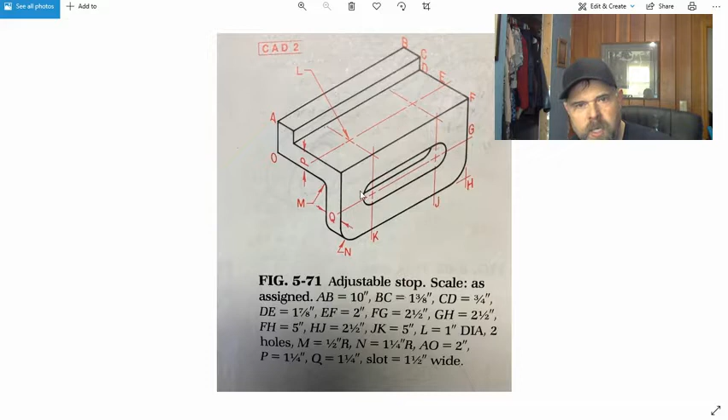What I'm going to do, whereas we've been drawing this as our front side, everything pointing toward the left is our front side, your bigger view, your most interesting view is your right side view. So I'm going to turn that around and make that my front view, and get started with that.

And I'm going to go ahead and download that template real quick, my multi-view drawing template here. It's got all my layers there.

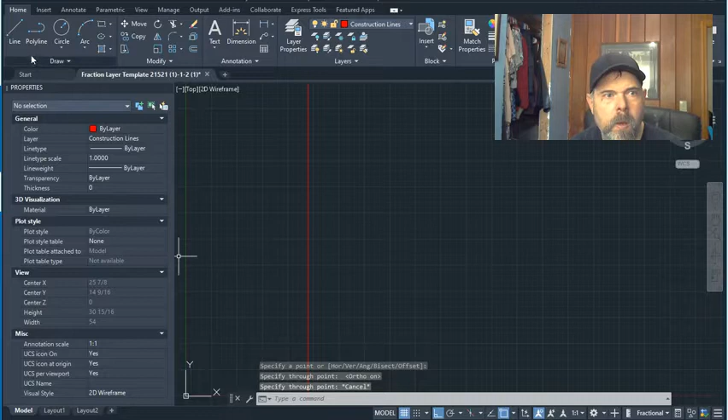I'm going to go in here, go ahead and set my construction line as my 0, 0 point. Turn on my ortho. Get my construction line again and set my horizontal 0, 0 point.

Then go back to my drawing example. I'm going to start here with this N, this H to J or N to K. We know that H to J and N to K are basically the same size. I know H to J, which is right here, 2 1/2. I know 2 1/2 plus 5 plus 2 1/2, right? So I'm going to just draw a line 10 inches long.

I'm going to draw it out 10 inches. Draw a little flag up, just going to hit a little flag there.

Get back to my drawing example here. I know H, F to G, G to H. We know that's basically 5 inches. We know F to H is 5 inches because it tells us right there it's 5 inches.

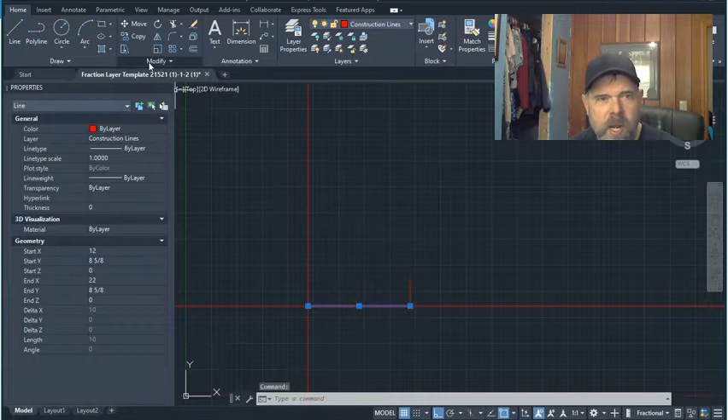So what I'm going to do is I'm going to offset that line that I've drew 5 inches. Type in 5, put it up here. And then I'm going to use construction line here and draw a line straight up.

Now get back to our drawing here. I know at this 2.5 inch mark here, there's a line that comes through there that sets our center for our slot. All right, so I know that. So let's go ahead and set our center line there.

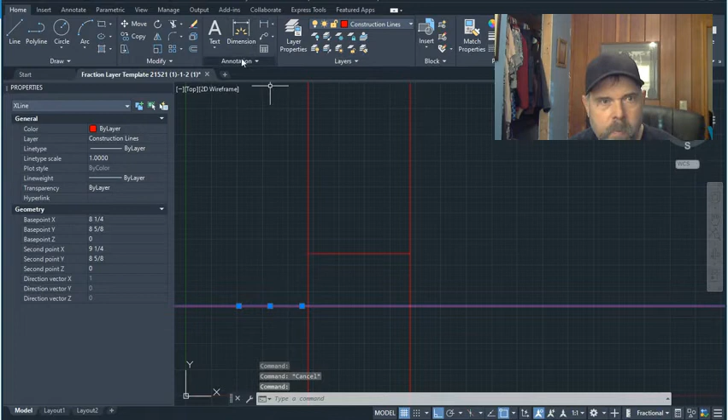So I'm going to set that line, I'll set that. I'm actually going to offset it as a construction line. I'm going to go at 2.5. Set it.

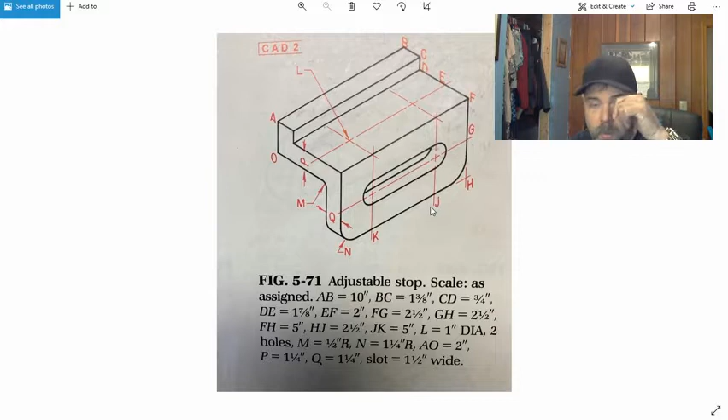And I know coming from H to J is my first dimension for my hole there. H to J is 2.5. So I'm going to go ahead and draw that 2.5 inch marker.

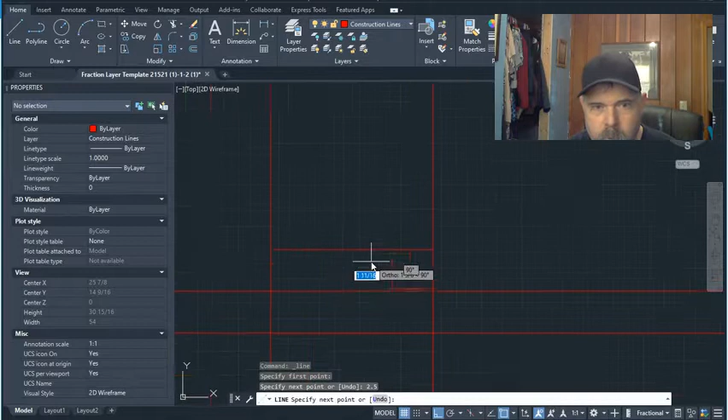2.5. Draw a little flag up so I can zoom in there. Oh, wait a minute, something got off there.

Evidently my line didn't snap there. So I'm coming in 2.5, 2.5. Draw a little flag up there.

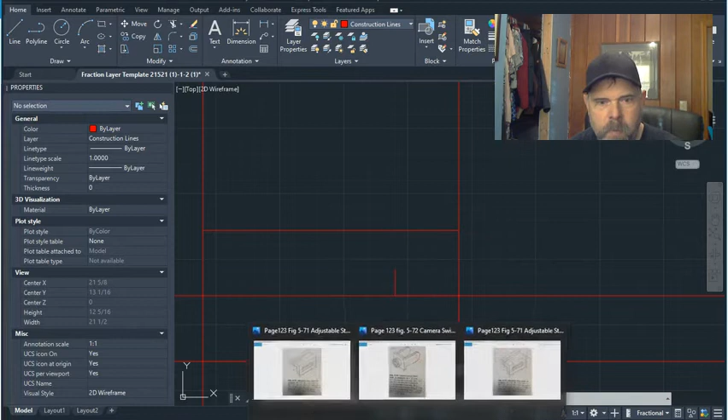Now I'm going to get back here to my drawing example. I know that hole, we know that L is 1 inch diameter. We know the slot is 1 1/2 inch wide. So we know this is 1 1/2 inch diameter, and this slot here is 1 1/2 inch diameter.

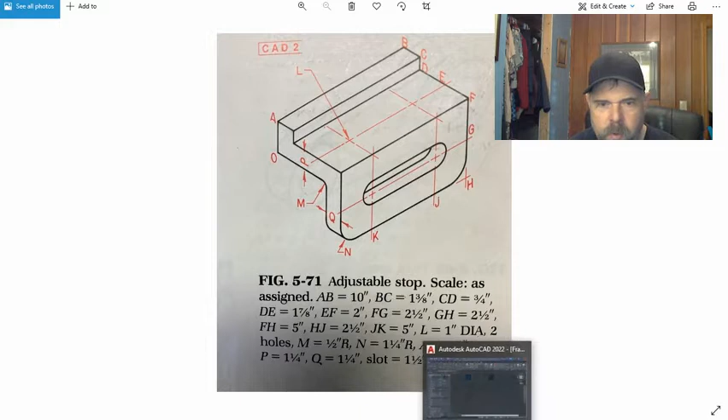So let's go to the drawing. Get our diameter tool, 1.5. And what I'm going to do is offset this circle here 5 inches. Not the wrong way, it'll be easier to copy it.

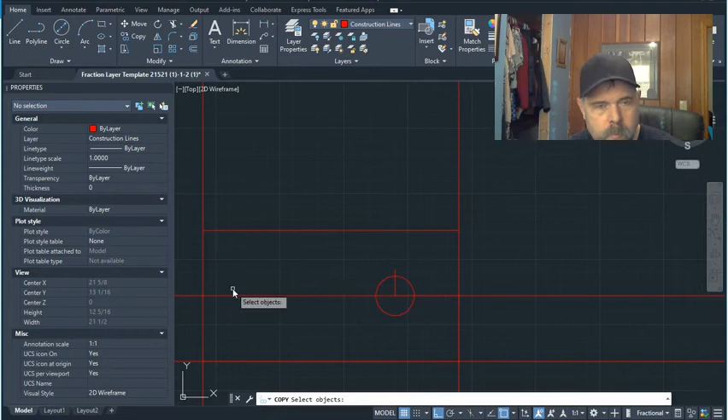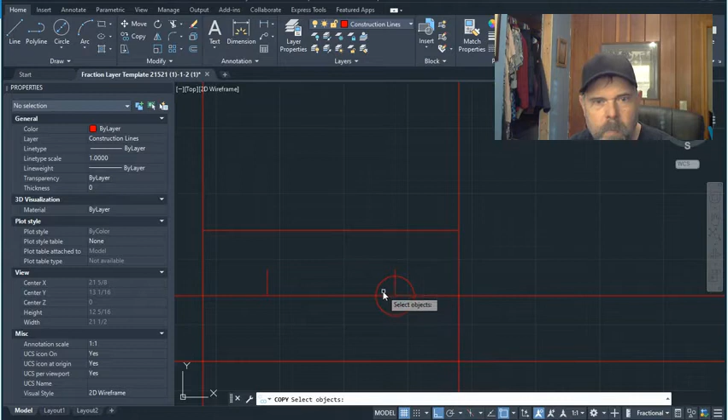Easier to offset that line first, and then copy my circle. Actually, I don't want to offset the circle, I just want to copy it. Yeah, the circle gets sort of funny when you go to offset it. It wants to offset using the same center, so that doesn't work.

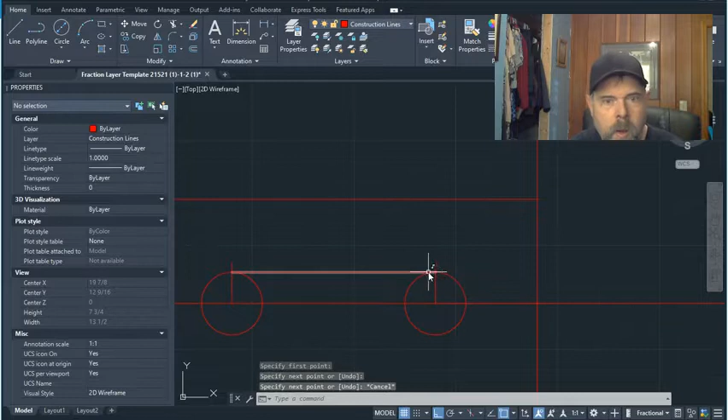And I just jumped off that. Now I can draw that line on the bottom, but guess what? Why don't we just do it this way? Just mirror it.

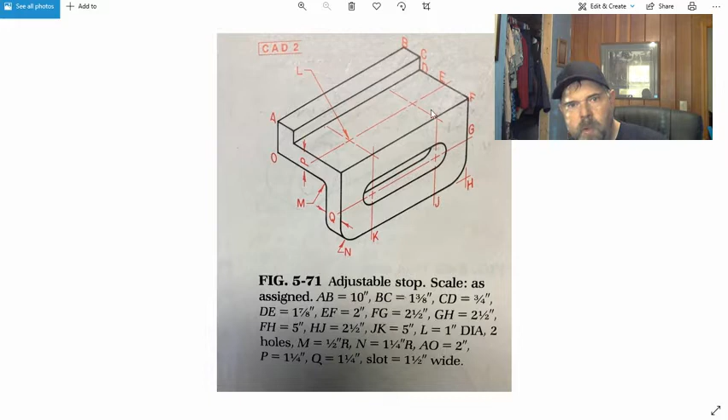And tell it, no, we don't want to erase that source line. Then we're going to go back to our drawing example. That 5 inches goes up to that corner, and then on top of that corner, we're going to see C to D. It's 3/4 inches above that, so we got to go to there.

So what I'm going to do, instead of just drawing that line up, I'm just going to offset that 0.75.

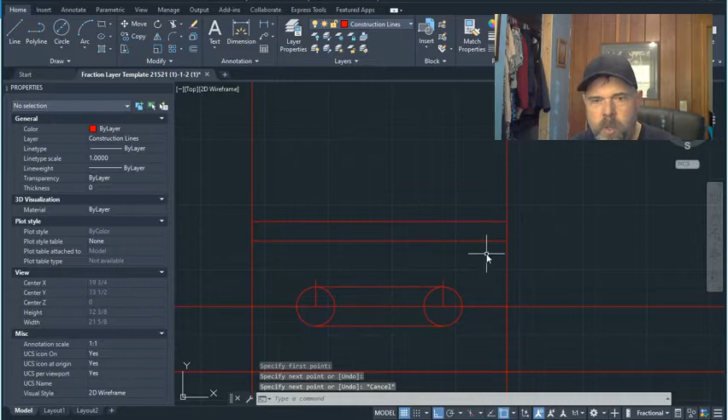And you can come back here and draw these lines in on your construction lines, or you don't have to. As long as your object lines are attached, that's all that really matters. Your construction lines are there just to help you get that drawing done.

All right, so let's scoot over here. Oh, I got to finish the radiuses down here. Now again, you don't have to do this on both sides, your construction lines and your object lines. But I just want to remind you that N is 1 1/4.

So what I'm going to do is go up here and hit my radius tool. And of course, I don't have a regular line there, I've got a construction line, so I have to draw my line straight down, on both sides.

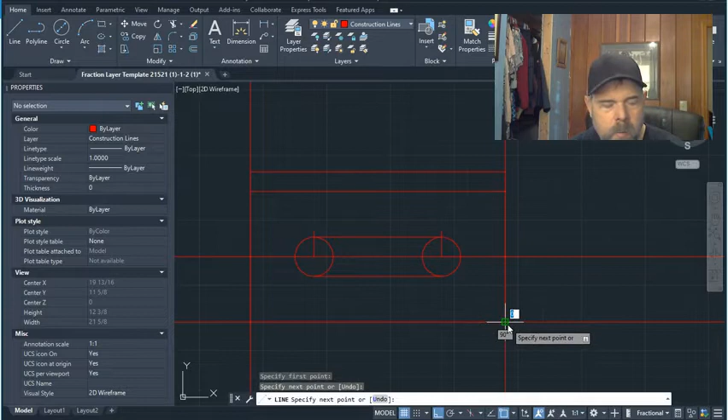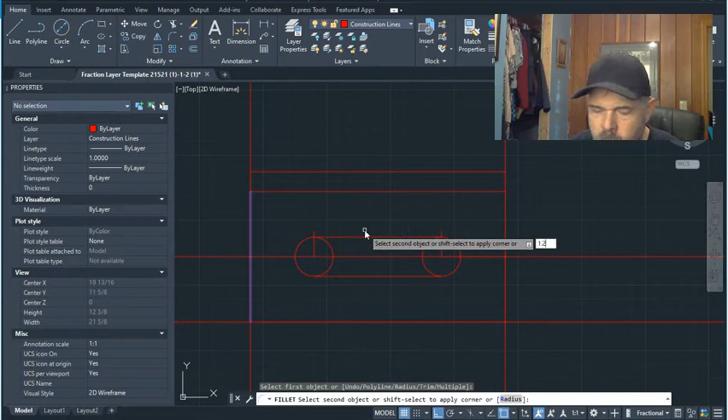If I was doing this as an example here, I would probably not draw it on my construction lines. Draw it on my object lines.

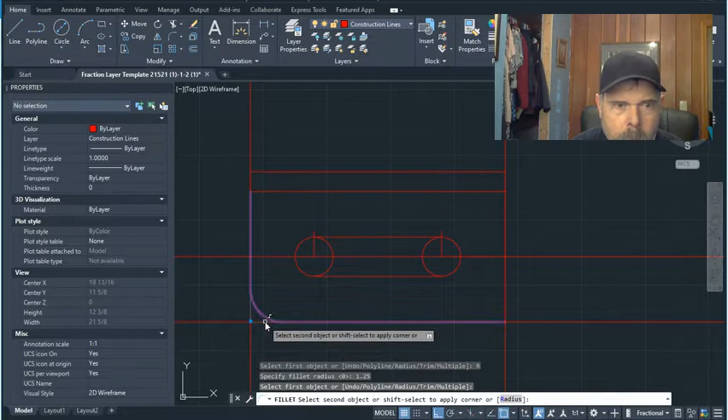All right, try this for a third time here. Third time's always a charm. My computer was being a little silly here. 1.25.

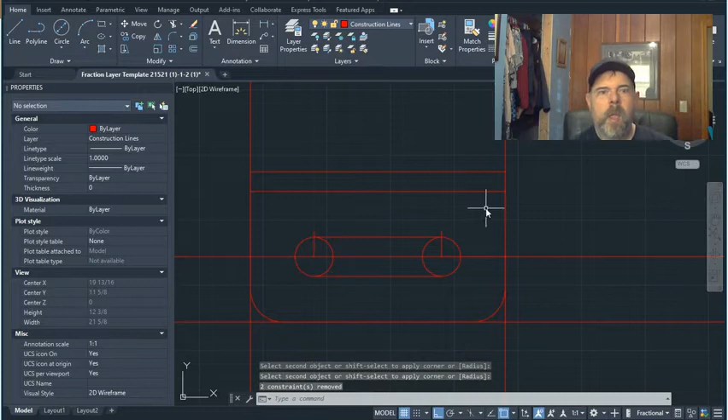Now, that is your construction line layer for that front view, except for you got hidden lines that are going to be showing up through here. Now let's go ahead and move up to the top and do that one next, because it'll be much easier once we get that done to bring our hidden lines down.

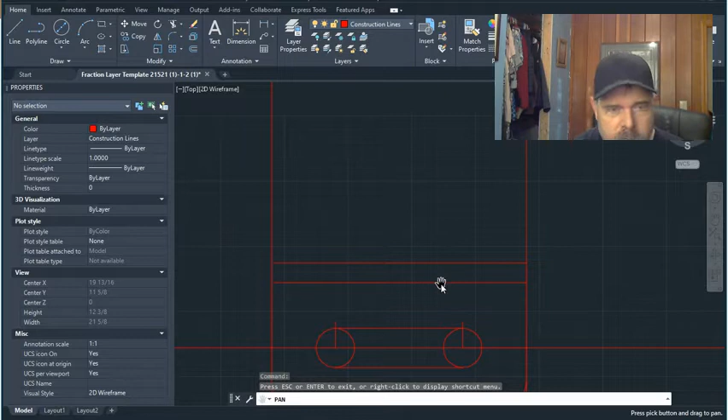I'm going to take that line and offset that 2 inches above. Get back to my drawing example. I know that B to C is 1 3/8. D to F...

All right, so we're going to have to do it this way. Use my calculator. So I know that B to C is 1 3/8, or 1.375. Plus D to E is 1 7/8, which is 1.875. Plus E to F, which is 2 inches.

So we're looking at 5 1/4 inches there from F to B, 5 1/4. So I'm going to offset that line 5.25.

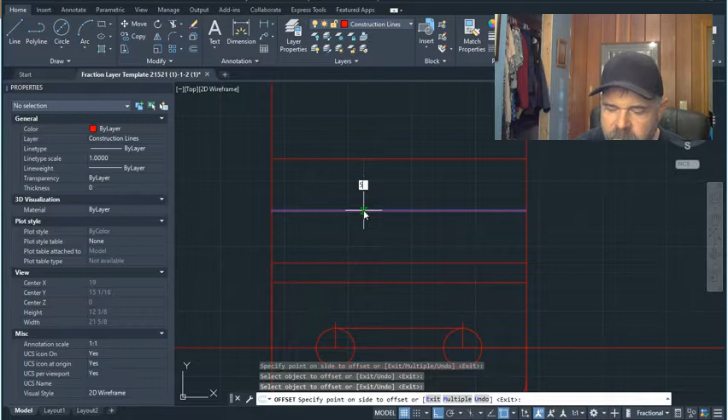And there it is. Now, looking at your drawing example again, I know that B to C is 1 3/8. So I'm going to offset that back line forward 1.375.

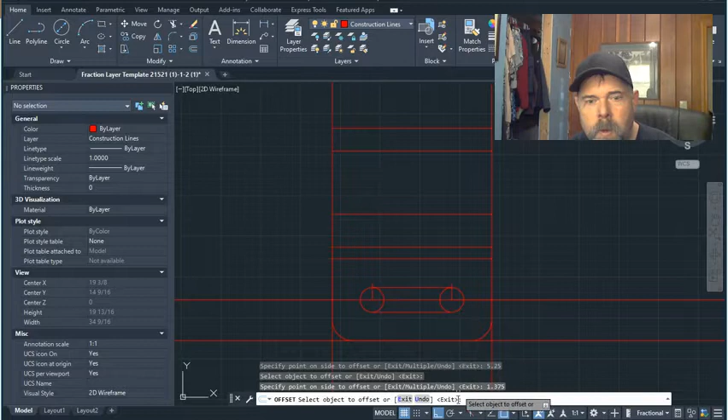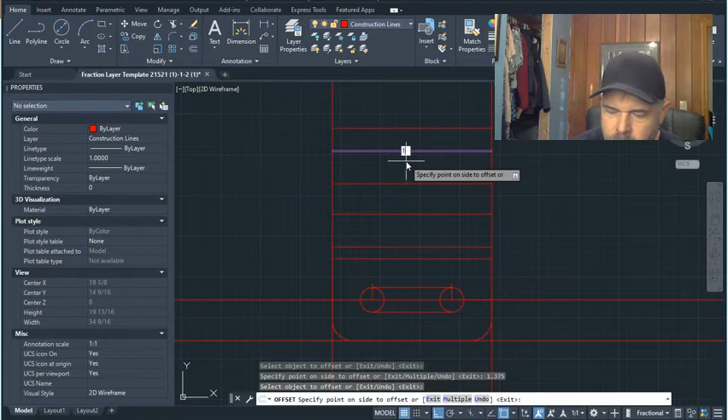And I'm going to offset that back. That's where we put C, which would be coming down to the edge of D. I'm going to offset that D to E distance, D to E, with 1 7/8. So I'm going to offset that line here 1.875. Not 1.85, 1.875.

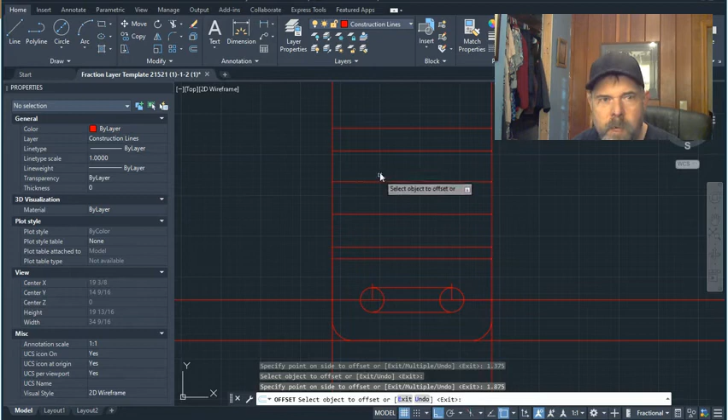But we got to find the location of those, and they're at the same distance as J and K as centers. So we know H to J is 2.5. So let's come up here and come down from the end, 2.5, 2.5.

All right, we're coming over here for 2.5. Coming over here 2.5, 2.5, that's 5. We could come back from this end 2.5 and this end 2.5. Or what I basically did is I offset this one, came over 2.5, and offset that one 5, which would make this 2.5 to this end.

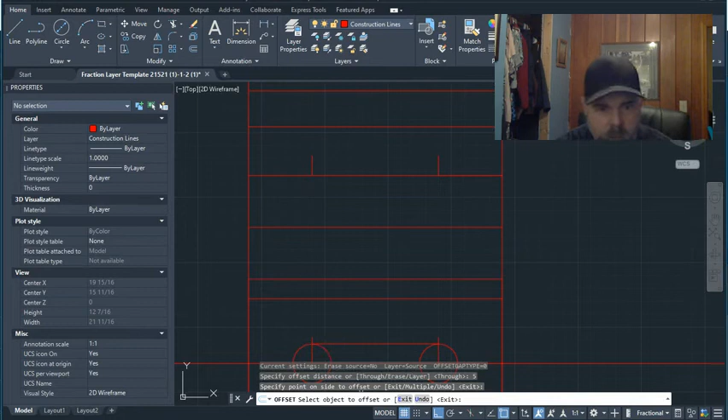So let's go back to our drawing example and make sure what our circle is on this top up here. We know that that's 1 inch diameter. There's not a slot there, just a hole. A 1 inch diameter hole.

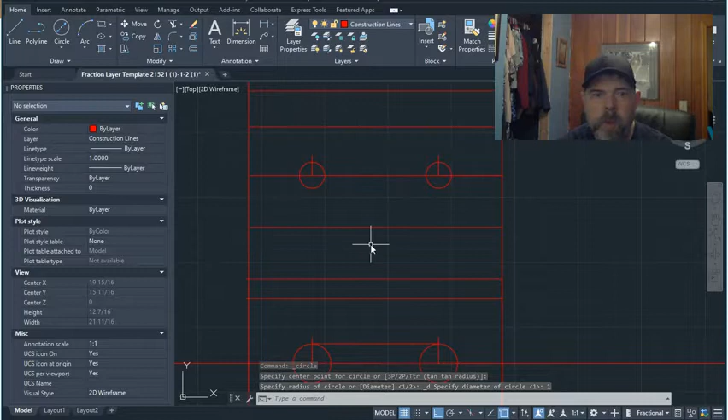So, 1, 1, and now we have... you got to show the thickness here of that object here.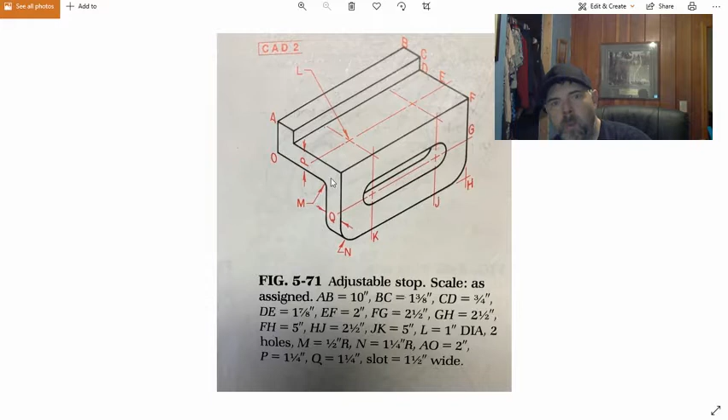Because we know that object here is the thickness of P, it's 1 1/4. So I'm just going to go ahead and do that. I could do that off of my right side, but I'm going to do it off the front view because I know that's going to be 1 1/4 down from that. So 1.25

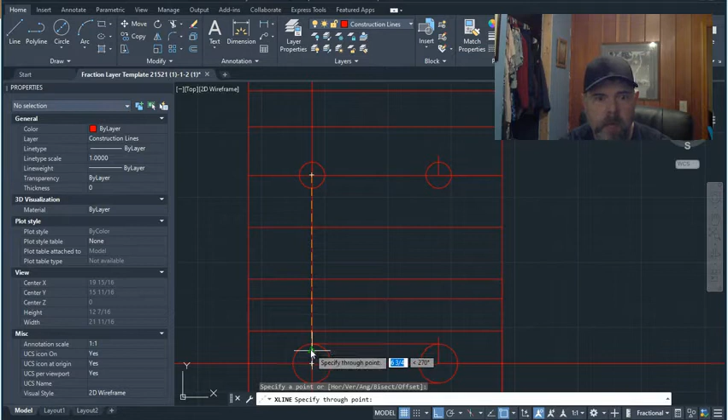Down this way, and then I'm going to do my construction line down to the center here. Now the construction line here. Oh, there we go.

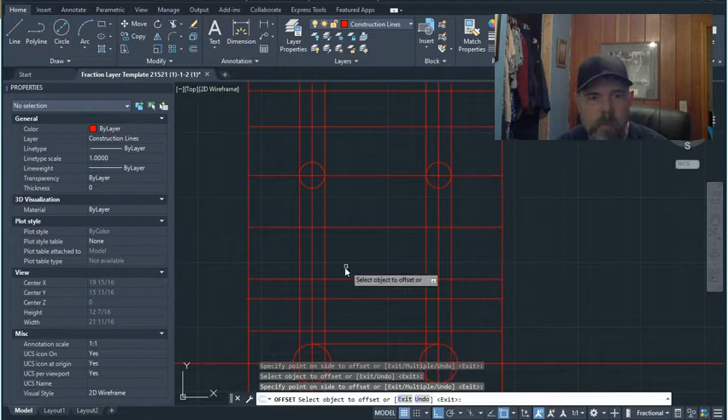Now, I know I can offset that line 1/2, 0.5, to the outside. 1/2 to that side, 1/2 to that side, and 1/2 to that side. That's a 1 inch hole. There's no slot in the top, but it's a 1 inch hole.

All right, let's look at our drawing example again. That's pretty much all of our features for our top view and our front view.

Now let's go to our right side view. Get your construction line here. Pull that over this way. I'm going to take and offset this line here 2 inches. Just 2.

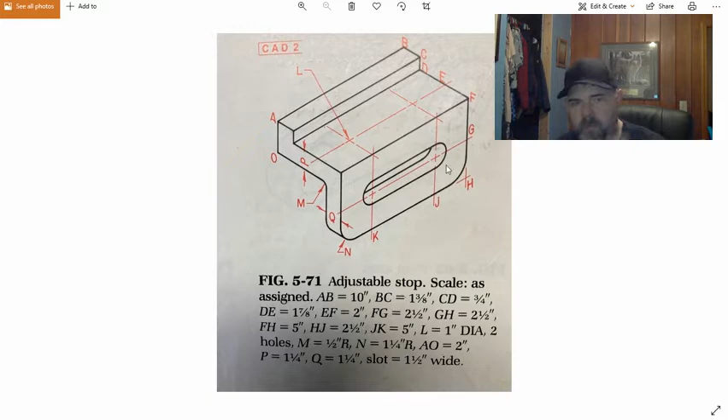Now you notice this object is really, really big compared to anything we've drawn before. All right, so let's go back to our drawing example because I want to know how far to offset the whole thing here. From the front edge to the back, we got F to H, that's 5. Got E to F is 2. We got D to E is 1 7/8, and B to C is 1 3/8.

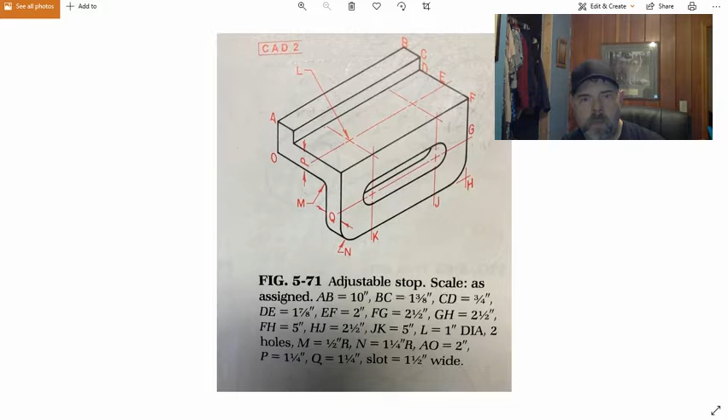So let's go back to our calculator again. That's 5 1/4 inches. So what I'm going to do is offset this backwards 5.25.

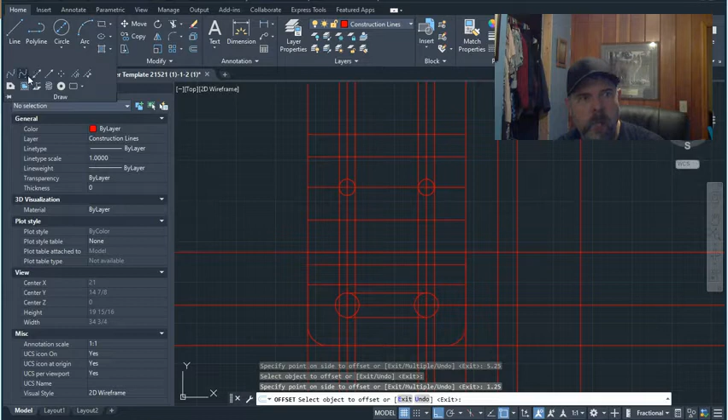If you look at the drawing example, I know I'm going to offset that front line on the left, the distance of Q, 1 1/4. So I'm going to offset this one in 1.25. Then I'm going to get another construction line right here and draw this line right there.

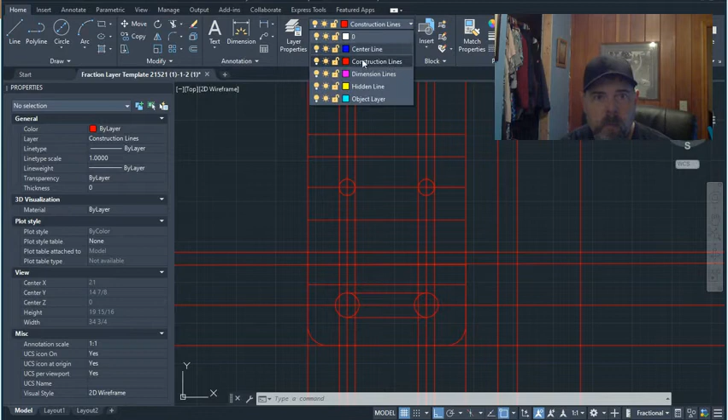Now, what I'm going to do is go ahead and start my object line layer. I don't want to do that. I just want to go to my layer and change it here.

Get my circle tool, 1 inch, and 1 inch. Get your line tool again.

And what I'm going to do is stretch that line straight down, and that way I don't have to make that arc. I can just use my fillet tool.

I'm going to offset. I could offset that line 3/4 of an inch again, but I'm not going to do that. It's just about as easy for me.

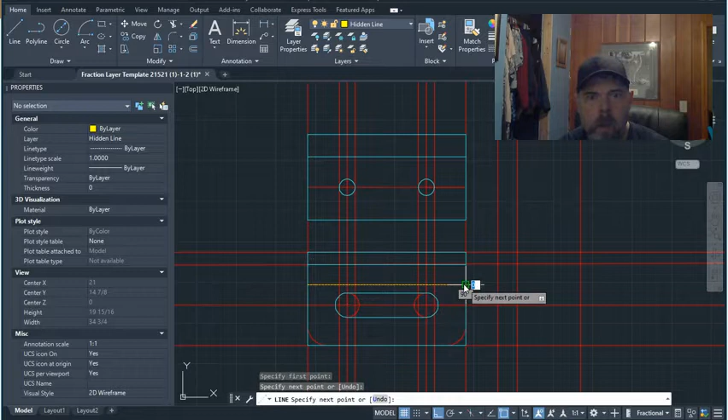I'm going to go to my hidden line layer. Then I'm going to go back to my radius tool, back to my object line layer.

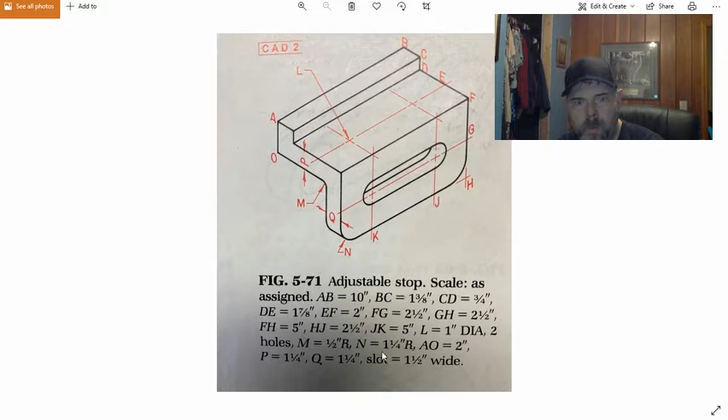Go back to my drawing and remind myself of what the radius of that is. So we're going to N, which is 1 1/4. Radius, 1.25.

Radius again. Hit enter because you're going to lock in that 1.25. All right, so that's your front view and your top view, except for your hidden lines coming through here. So let's change it to your hidden line layer.

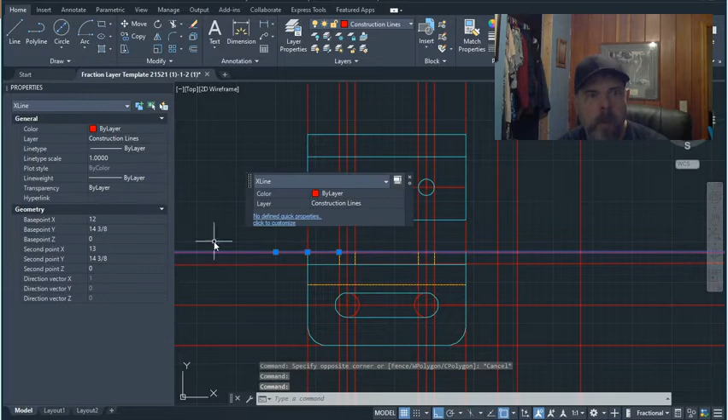And what I'm going to do is offset this line up here. I don't want to change the line, I just want to change it. So I want to hit escape. I want to offset that line 0.25 up, and I'll set this one down 0.25. And that way my hidden lines here and my center lines get drawn there.

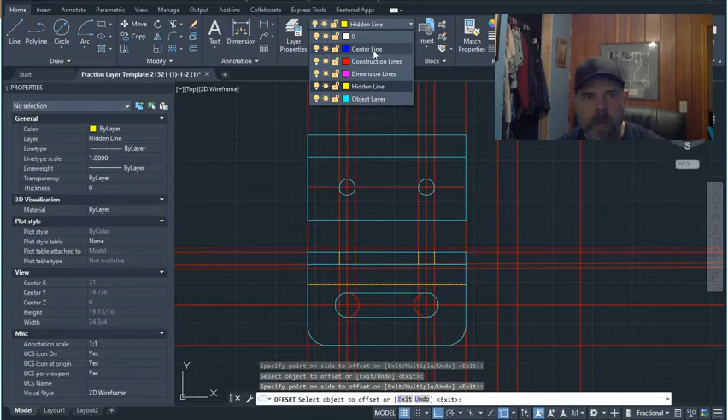And then I'll go back and work on my right side view. So I'm going to hit escape, get my center line tool, center line tool here. And now I'm going to finish up our right side view.

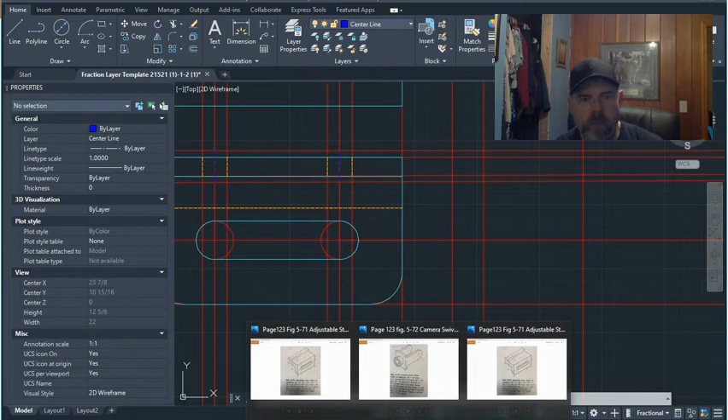Now that I can see those lines, I know this line has got to come forward for that backside. It's got to come B to C. It's 1 3/8 or 1.375. I know this has got to come forward 1.375.

And let's go to our object line layer, and basically what I'm going to do is just block this in real quick. Actually, I'm going to hold on to doing that line just a second. I'm going to bring this line down for the thickness of that,

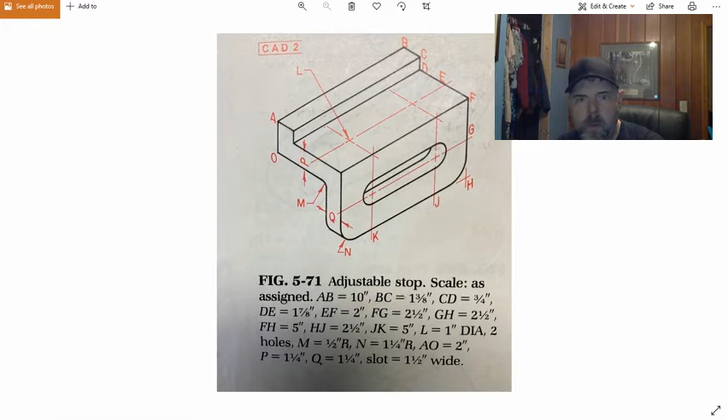because we know the thickness of that top, that's P, is 1 1/4. So I'm going to go down 1 1/4 with that. 1.25. I'm going to go here with my object line layer.

And mark that all the way around. Now, this line, this circle of this slot coming through here, you're just going to see it as hidden lines. And I need to remind myself of what that measurement is.

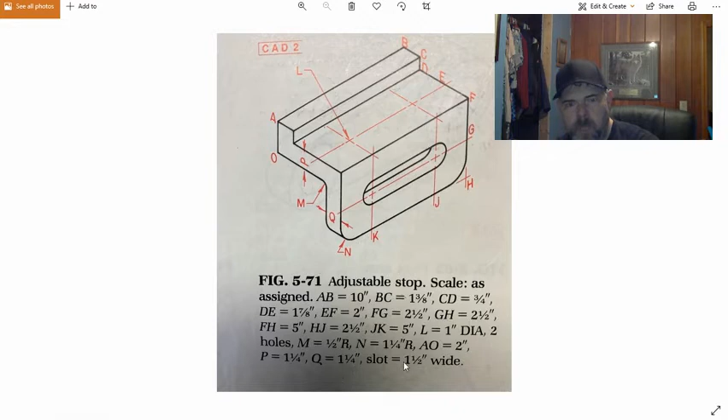We know that the slot is 1 1/2 inch wide, right? Slot says 1 1/2 inch wide. So what I'm going to do is offset that line from that point, 0.75 to the top and 0.75 to the bottom.

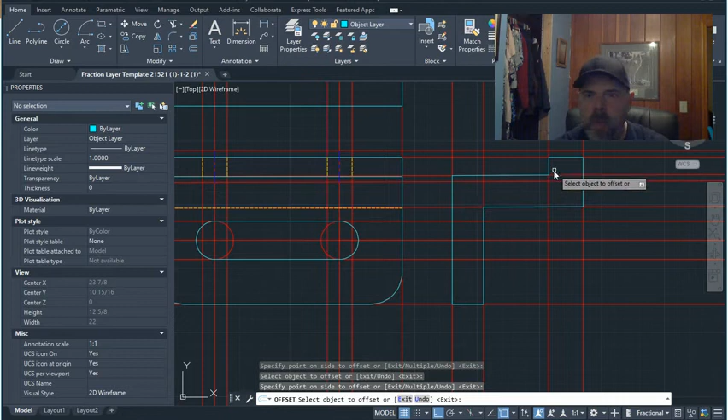And then I know that hole is directly in the center of this point here. Now what I'm going to do, I know this is 5 1/4.

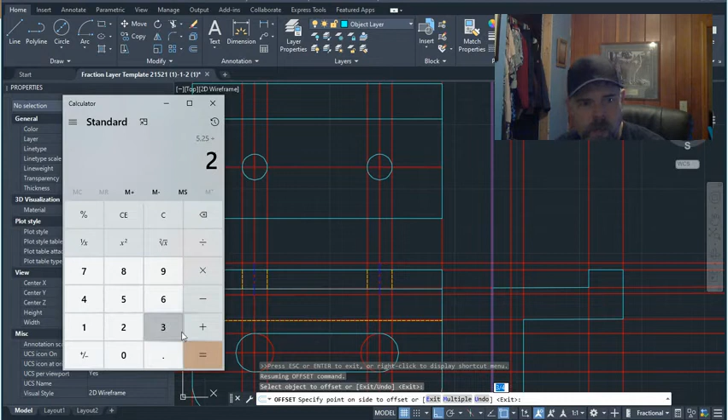I'm going to offset that line. Let's divide that by 2 to make it a whole lot easier than trying to do it in my head. 2.625, or basically 2 5/8.

I'm going to come off with that offset 1/2, 0.5. Now all I've got to do is my hidden lines.

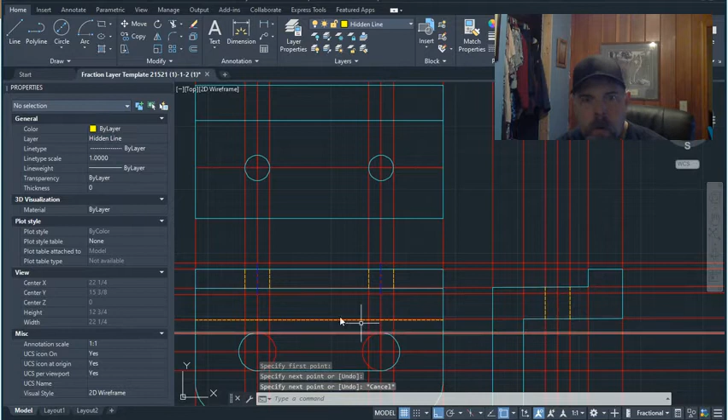Go up here and draw my hidden lines in. Hidden lines in. Draw my hidden lines in here. Draw my hidden line in here.

Now from the ends, that's going to look like a rectangle from this slot here. Now what I'm going to do here, I'm going to offset that line 1/4 inch to the front to make it easier to get my center line in there.

Offset this one 1/4 to the back. And I need to get backwards on that one because it set it to the wrong side. Sorry. .25.

Now I'll change it to my center line layer. Get my line tool. Actually, I...

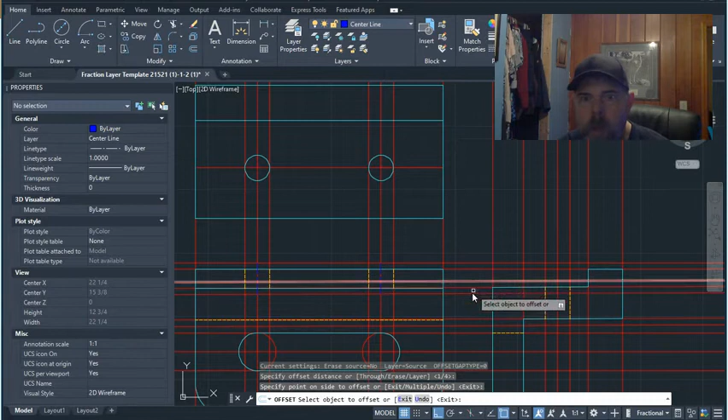Need to offset that line too. I forgot all my lines I need to change. Now we go to get our line tool.

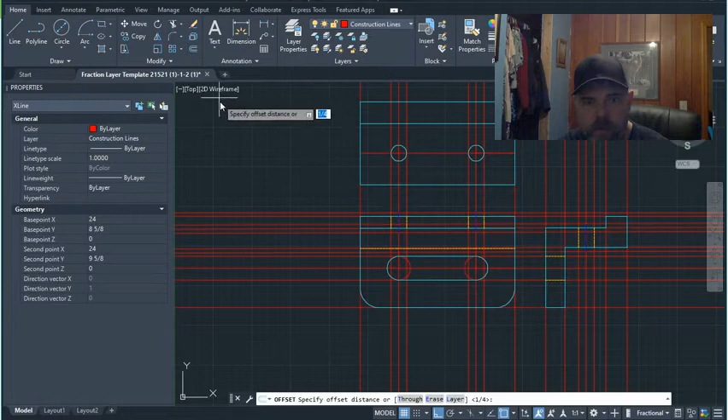Move our drawing around a little bit. I need to draw the hidden line there. I need to draw that offset 0.25 to make it easier on myself.

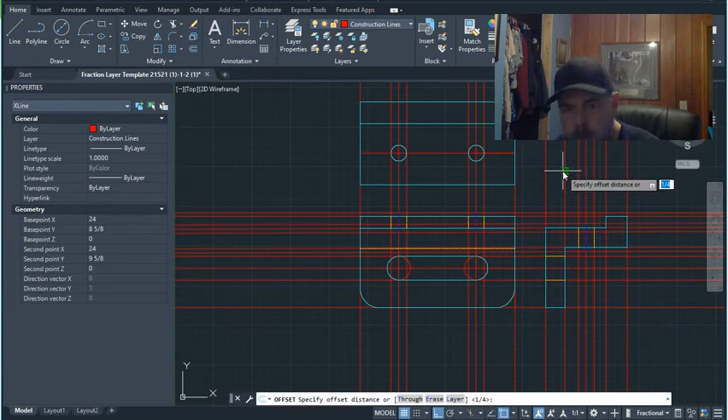Gotta go backwards. All right, now change it back to our center line layer.

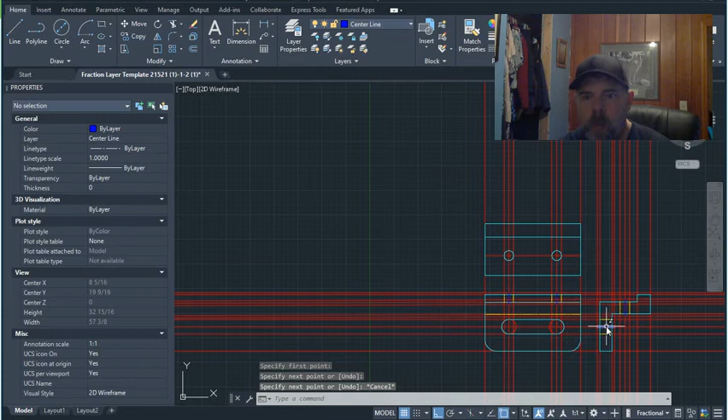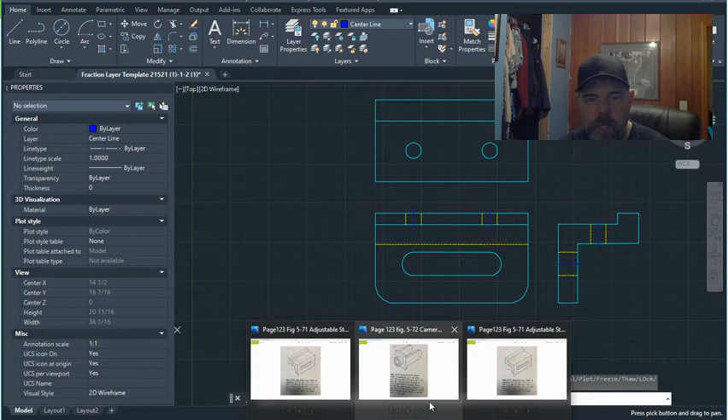Now I got one other place I need to change here. According to what the drawing looks like, but let me go ahead and turn my construction line layer off, that way I'm not killing myself by looking at it. This is the last place we've got to change.

M is a 1/2 inch radius. So let's go back to our drawing. Let's go to radius. This is R, 1/2 inch, 0.5.

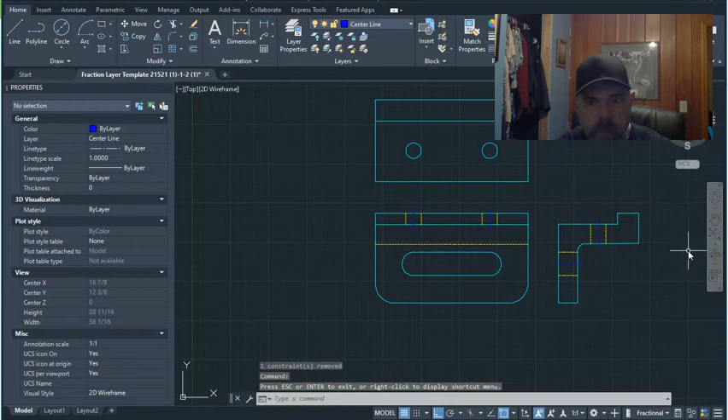And there you go. Now that's the drawing complete. And we just need to make sure we're complete with all the dimensions here. So what I'm going to do is move it around and dimension it.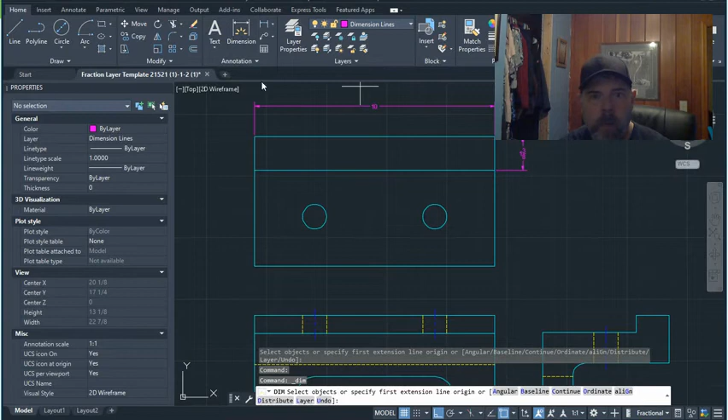Not with this center line, though. I'll need to go to my dimension lines. Get to my dimension lines here. Your dimensions give it to you from here to your center line.

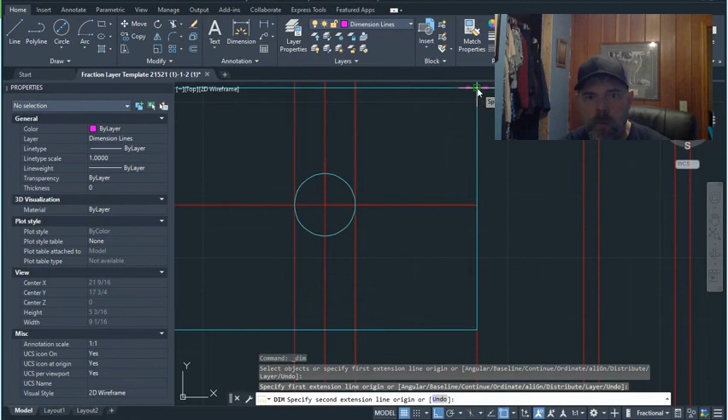So what I'm going to do is turn my construction lines back on just so I can dimension to my construction line. Then I'll turn those back off. So we're going from here to here. Remember, we chained those dimensions by clicking them at the same point.

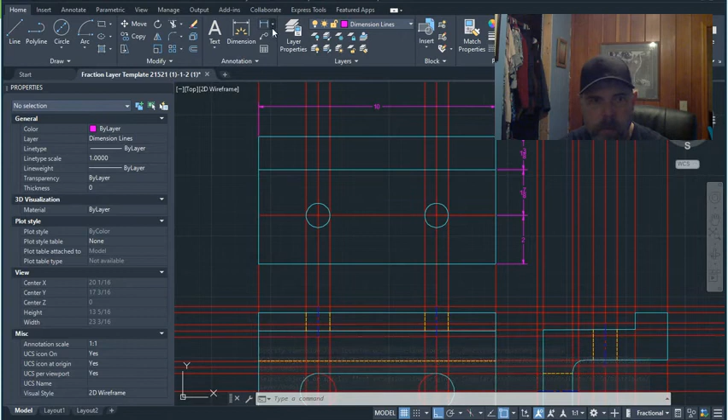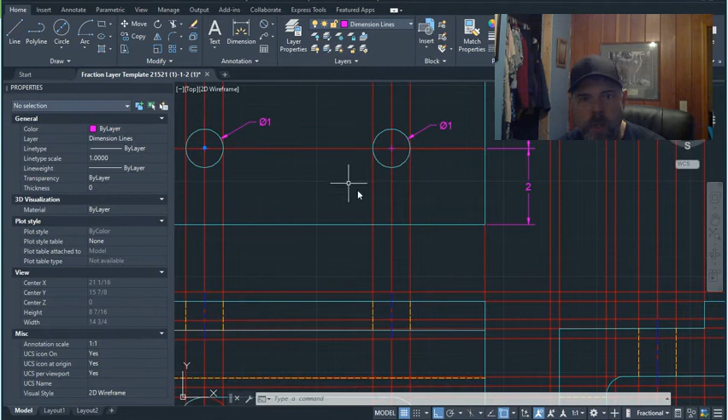We know that circle diameter is 1 inch. We know this one is 1 inch. We know your dimension. Let me turn those construction lines back off now. I think that's all I need those construction lines for, is for that dimension.

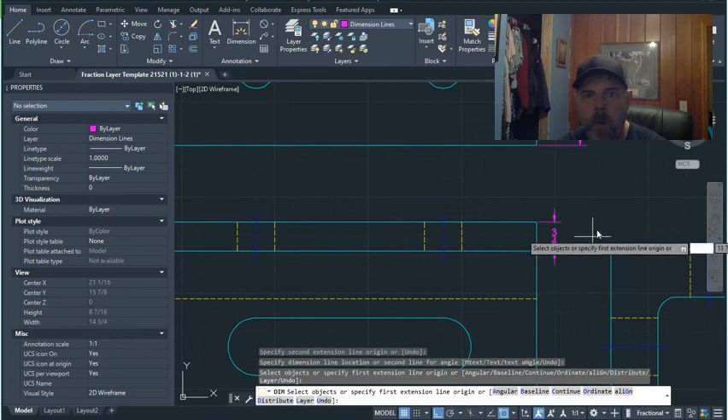We need this dimension here. We need this dimension here for your overall height.

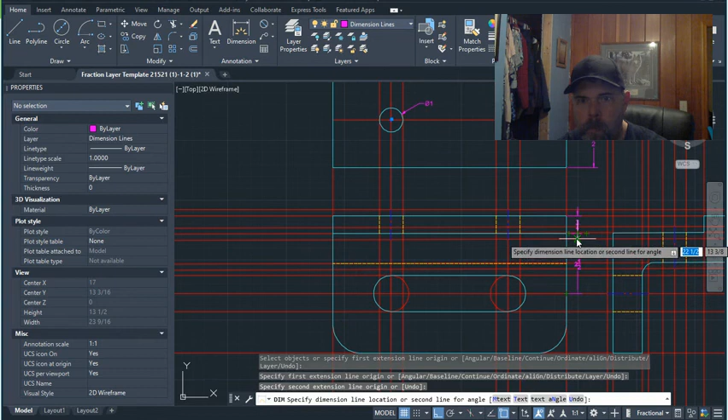Hold on, you do need the construction lines back on. I'm sorry. You need this construction line for that one. And we'll move this up here.

Dimension that. We're going to dimension this from, we know this line to this line, or this point to this point, was 5.

We know from this point to this point here, you need to know this radius here, because they give it to you in the example.

You need to know this radius here. And then I'm going to turn my construction lines back off.

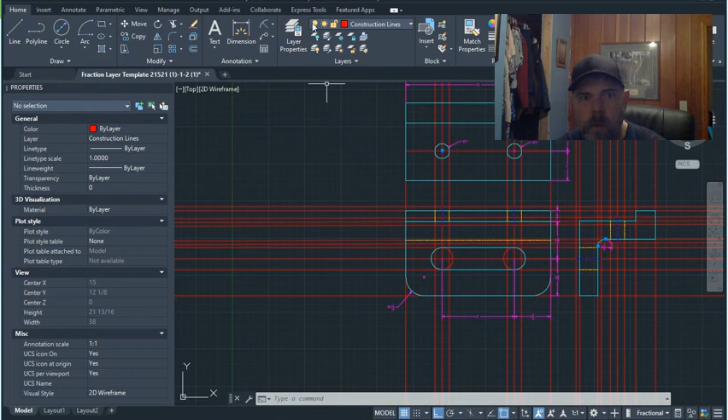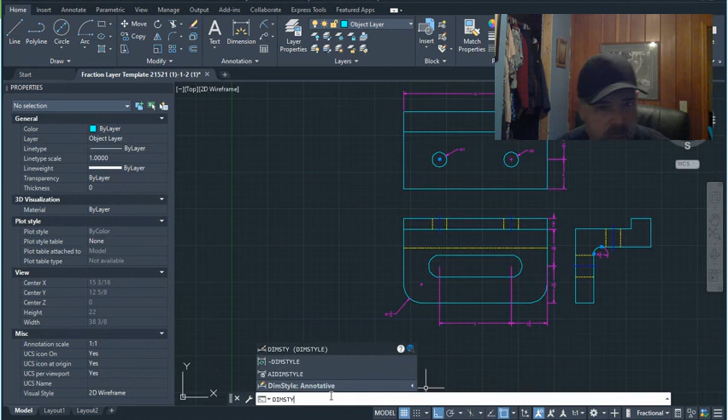We'll change it to my object layer. Now, if you want to make your dimensions bigger, just go to dim style. This is the largest drawing we've done. Modify.

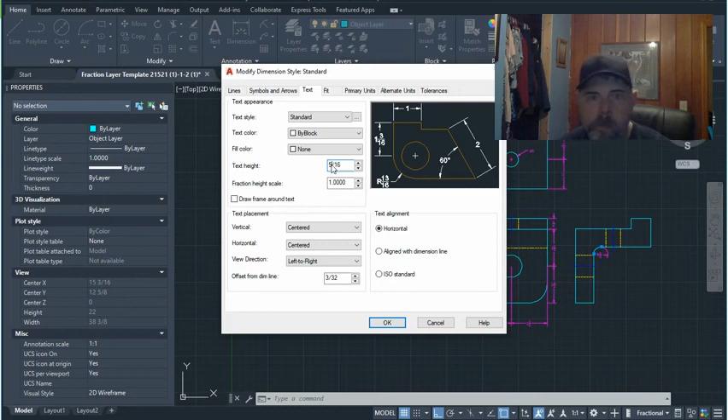Your text, you see your text height is 3/16. Let's change that to 5/16. Your primary units are fractional, that's what they should be. Hit OK, then close.

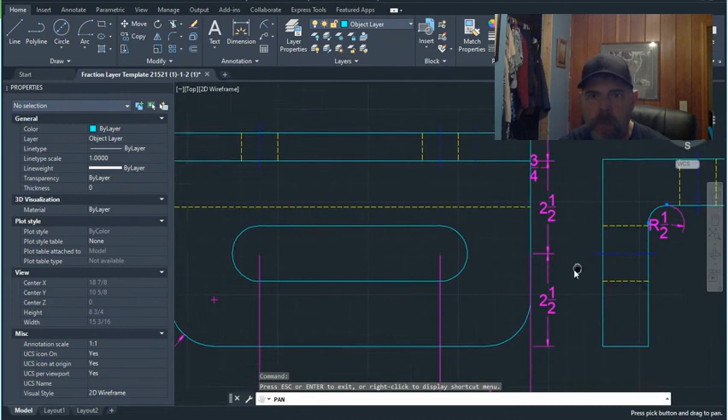Now what we may have to do is go back in here and change some of our dimensions and how they're set up there. So you may have to change this one by pulling it all the way, well, delete that one.

Don't use your object line layer to dimension with. Need to dimension that from the other direction there. I guarantee you. Yep, that's going to work.

Now, these dimensions are a little close compared to what they need to be, so we're going to drag them out just a little bit. Want those to line up there.

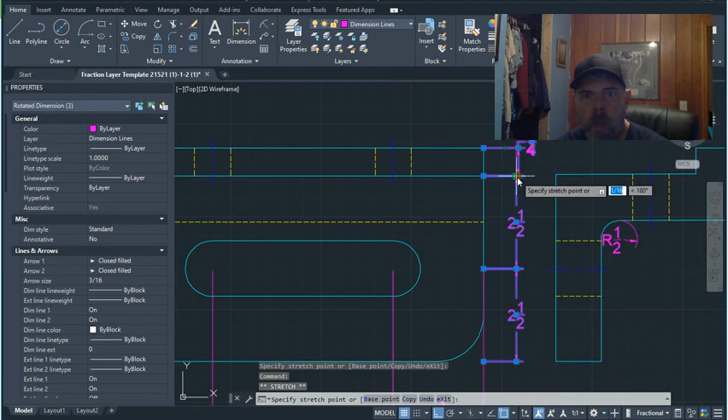Now, that's all your dimensions on that drawing.